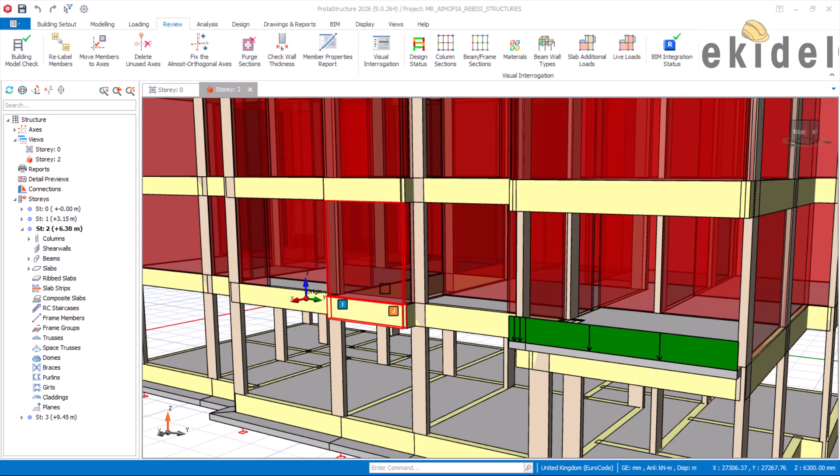In our last video, we performed the structural design for this building and for the raft foundation. In this video, I'll be showing you the structural detailing for this particular full building, and we will be using the detailing template to detail this building, where I'll be showing you how to detail the right connection for the reinforcement between the toe slab, the beam, and the slab, how they're going to connect together.

Using the 2026 version, I'll be showing you the right detail for our building on a beam raft foundation here, and then I'll be walking you through this foundation detailing for the raft and also for the sections, as you can see here, showing the full detail section and everything they will need for the construction.

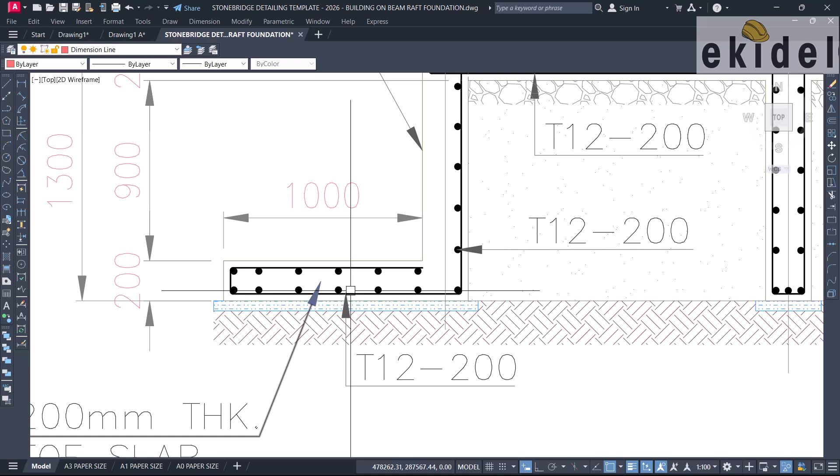And I'll also dive in to show you the structural detailing for the slab the right way, putting in all the lappings and all the principles for lap, and then also the connection for the reinforcement for the toe and the beam with the slab. You can see how they are connected like a stem, using a stem system principle, because a good drawing, a good design, and poor detailing can still collapse a structure.

So I will show you all the principles that you need to perform the detailing of this building, and also for the columns, how you are meant to detail the column base and the column section using the 2026 detailing. You can see a proper detailing here. Let's now dive into the full detailing for this building, which we did yesterday for the raft foundation design, knowing that this is a real life project we are working on.

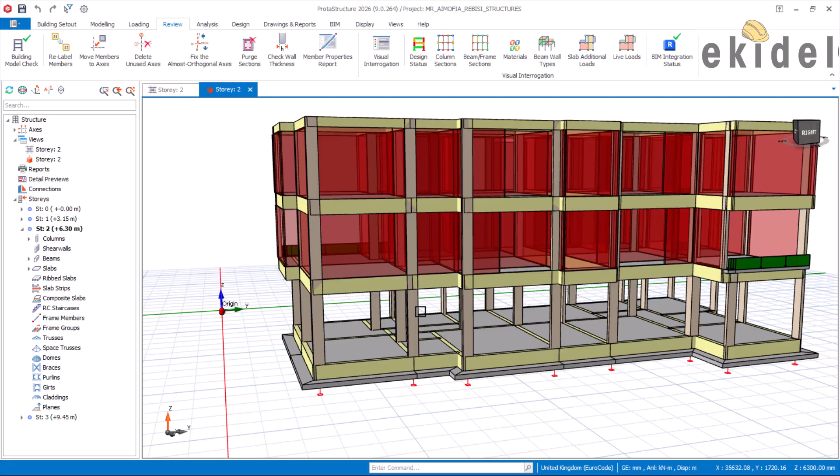So yesterday we performed the structural analysis and design for this building, focusing on the raft foundation, which we are done with, and now we are going to perform the structural detailing for this building, starting with the foundation. We will be using the detailing template to perform this structural detailing, so that we can get a standard structural detailing for this project.

Then we are going to export it using ProtaStructure, which we have already done in most of our videos. Once you're done with your design, which we finished yesterday, and you've seen your reinforcement, we then proceed to the structural detailing using the template, which works with AutoCAD. Now, this is the detailed drawing that was exported from ProtaStructure through the detail to AutoCAD.

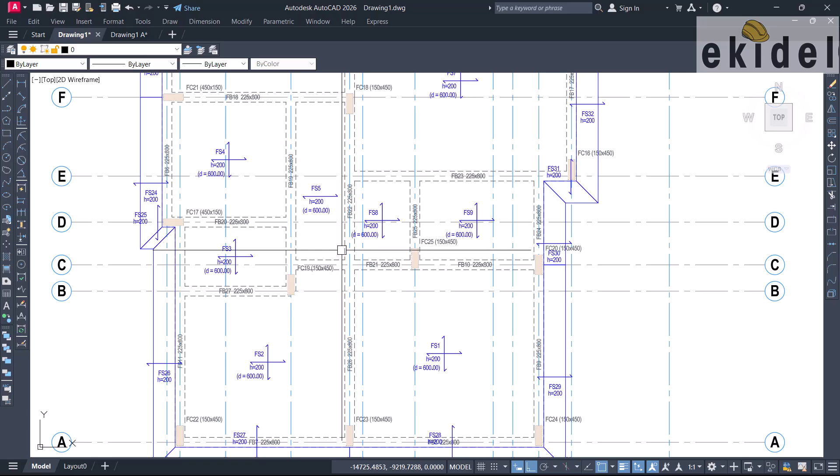Now, you cannot use this to present to your clients or for building, because it is not cleaned up and most of the detailing here is not correct, and you need to optimize this drawing, and that is where the template comes into play. So this is the raft foundation detailing.

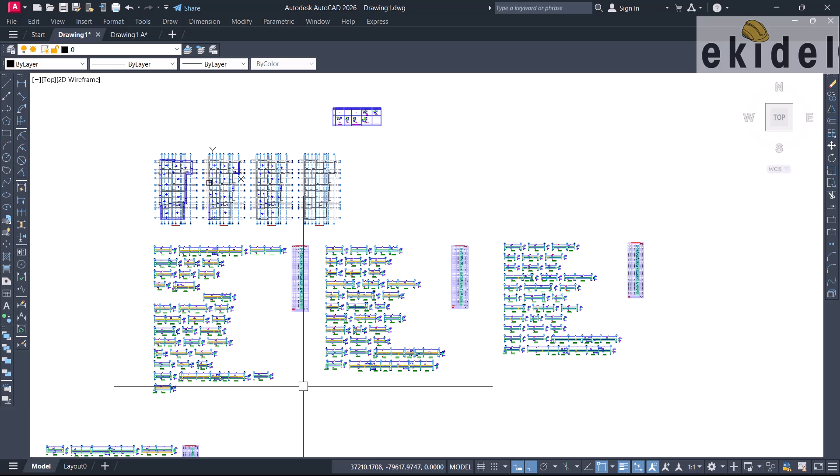We can see here F beam, which means foundation beam, and yesterday we used 800 depth of beam for our raft, and you can see the side bars and everything here, and you can see the bar bending schedule, but we are now going to optimize it using the detailing template. This is the column schedule, which we use for our column detailing using the template.

So I will now go and open the template. If you already have the template, it's located inside your document folder. If you don't have it, you can go to our Ekidel store just below this video description. You will see the link to get this 2026 template, and it will be sent to your mail automatically. Once you have that, you then open it just like this.

On opening it, you will see the interface of the template here. On this interface, I will launch this. You can see that it has different tabs. Each of these tabs has different templates, and we are dealing with what?

A beam raft foundation. So we come to here that says beam raft foundation, and then click on here to open this up. Okay, that's fine. So wait for it now to open up on the CAD file, AutoCAD. Now this works for any version of AutoCAD, either 2017, 22, 2010, any version at all.

So once the Stonebridge opens like this, you will see a sample here showing you a guide on how you are meant to detail, and how your raft beam foundation is meant to look like. So this is a sample that you are meant to follow. Now we will head back to the other side here, where we exported our drawings. These drawings are not optimized, as you can see.

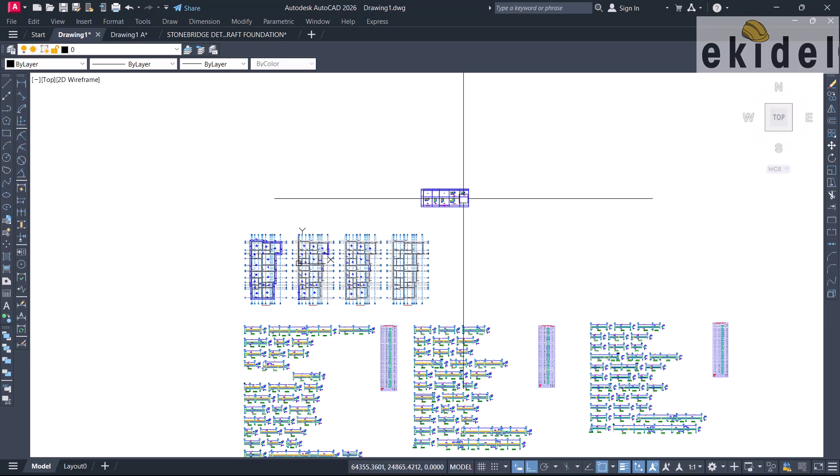So I will copy all this, highlight this, and then right click here and say copy. Okay, so copy from here, and open the Stonebridge template interface here. So I'll open this up, and then inside this box that you're seeing here, I'll paste it like this. Click here and then paste.

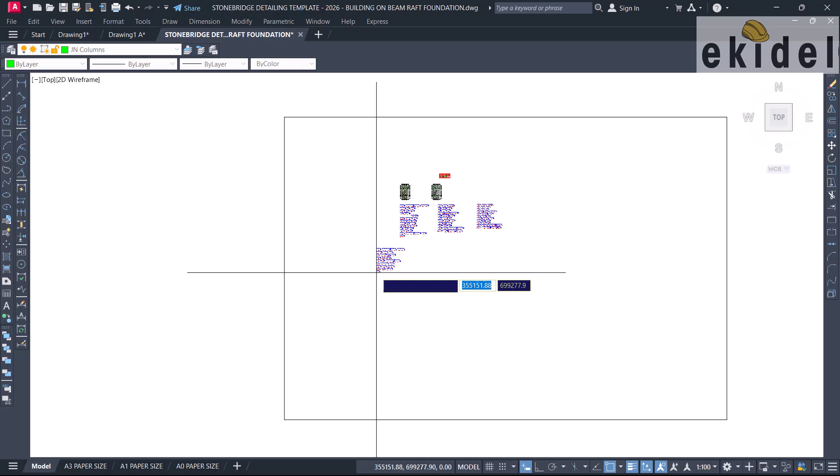Now once you paste it, automatically the Stonebridge will help you to optimize most of the drawings. Just allow it to paste. So we paste this here carefully, and you allow it to finish up what it is doing. So once it is done, it has helped to optimize most of the beams. As you can see, the beams now are optimized compared to what you had here before. So this is the one that came from Prota, and this is the one that's optimized. All this text now can be readable and also printable.

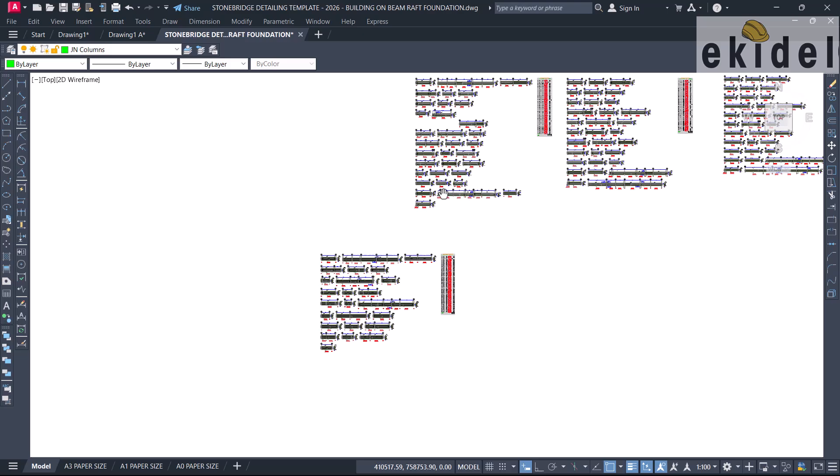Okay, that is fine. Then we will optimize also our beam dimension. I said that it is not dimensioned very well. If you look at the sample of the Stonebridge, they are showing you how your beam section is meant to look like. For example, this is the beam section here. You can see the text is appearing well. So this is the way it will look, and not this other way here.

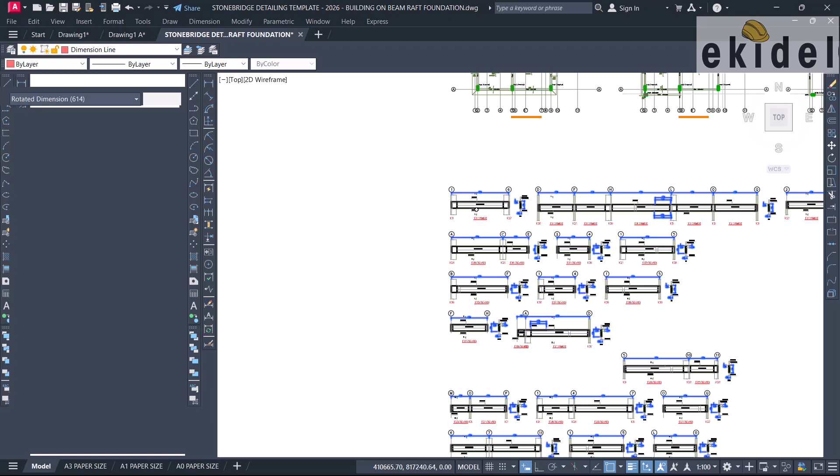So once you have pasted this here, what you do now is click on one of them. Right click and say select similar. Now scroll back and deselect this one so that it will not be among what you're doing. Hold your shift key and deselect this, and you have only this. Then type the shortcut CH and press enter, and that will open up where we can change that to optimize. Instead of doing it one after the other, Stonebridge helps you make it easier and faster.

So we then look at any of the sections like this. Let me start with the raft beam, which we have here, and then click on this dim style and then choose. You see STB beams. This one, STB beam dimension. This is the one we are going to use. So I'll click on STB beam dimension now.

Now once you pick the beam dimension, notice that the dimension will change. Can you see that they have changed? For example, here has changed from 4.5 to this. Here has changed from 225 to that value. Here is already 800. If I come again to change here, which is the right one, that will change. Just watch, it will change. Now when it changes, do not panic.

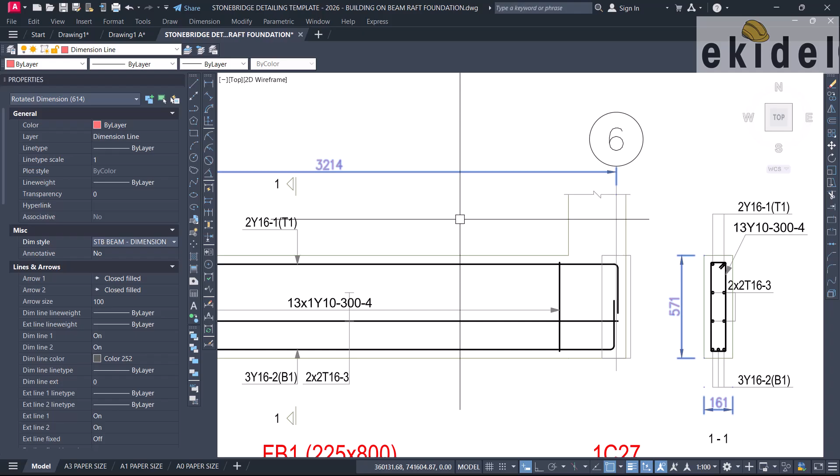Now what you use to control this is the scale factor you added when exporting your drawing from the Prota Detail into this place. For me, I used scale 1 to 35 for all my beam details. So you can see that they have all changed. Here was meant to be 225 by 800, but now we are having a different value. So once you pick this, don't click anywhere. Don't click on escape.

What you do is to come again, scroll down like this, and come to this place that says primary units. You see dim scale linear here that says 0.5. If you imported your drawing using the custom scale of 25, put this at 0.5. If you used 50, put it as 1. But now I used scale 35, so I'll put here 0.7, and then click anywhere else.

That will take it back to the right measurement. You can see that it is now 800 by 225. That's what we use. And this is also 45. Now for us to verify this, we've got to measure grid line 1 to grid line 6 on the foundation layout.

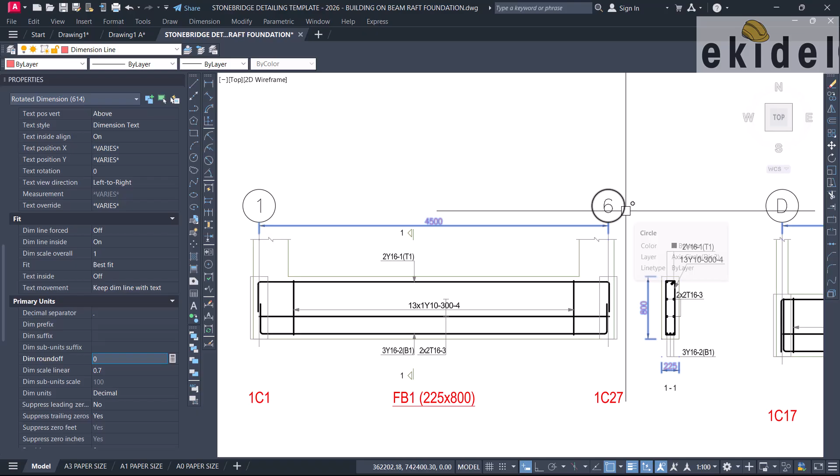So we then escape this and come to the foundation layout here. This is grid line 1 and grid line 6. So this was that beam that we saw. So we have to measure if this will give us 4.5 meters.

Now when you're measuring for a layout, type D first, enter, and make sure that the dimension line is set for STB dim 100 plan. Then click on current, and then say okay. Then let me change this to dimension layer here, dimension lines. Then I will dimension this from grid line 1 to grid line 6.

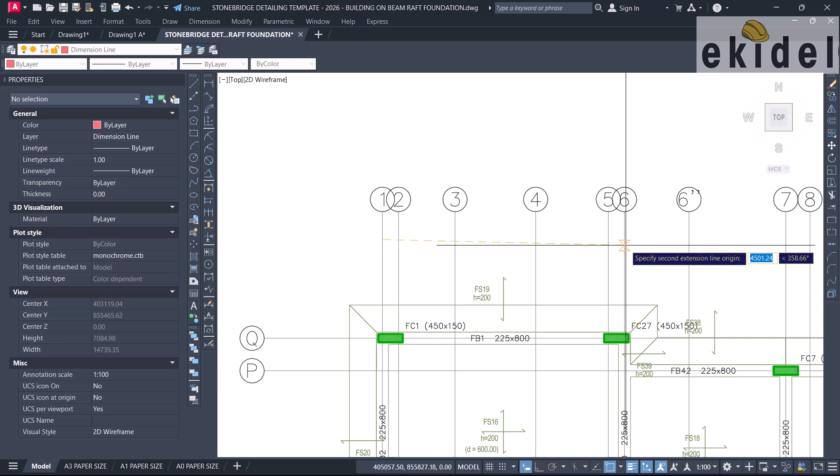What do we have? You can see that currently this is 4500. That shows that our dimension here on the beam is okay. So we go back, we have changed it. You can see that from grid line 1 to grid line 6 is 4.5, correct? And again, you can see the foundation, the same thing. So we have now verified this, and you can see how we have restored this back to the required dimension.

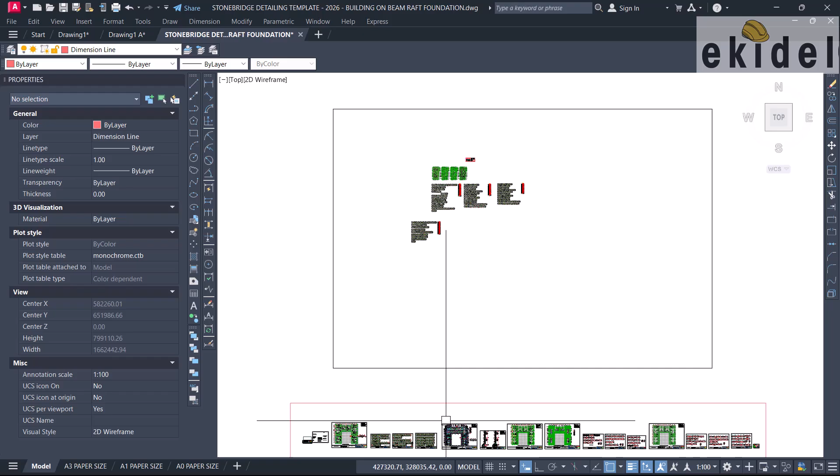Okay, that is fine. So next we'll proceed. We have now finished our beams. You just put them on the sheets, just as you are seeing here, arrange them like this on the sheets. But before then, we are going to focus first on doing the foundation layout, which is the first thing to do here, and the section.

So this part 1 video for this particular detailing is for the foundation layout, to make it look like this instead of what we have here. This is not nice to present to a client. So what we'll do now, we have to move this out, separate this from this environment, and keep it somewhere here. Okay, that is fine. Now once you've done this, let me close that one here.

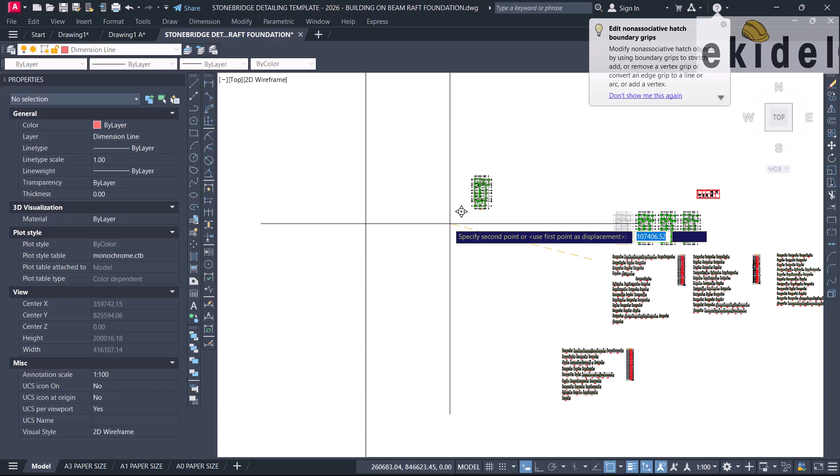We then go over to this sample here and bring our sample closer, because this is what we are following. Sorry, not this one. This is the layout we are working with, the first drawing. All these ones are notes, so they can be edited later. So copy this closer to where we are working, and keep this here. This template has been tested print worthy, so if you use it, it prints your drawing fine and standard.

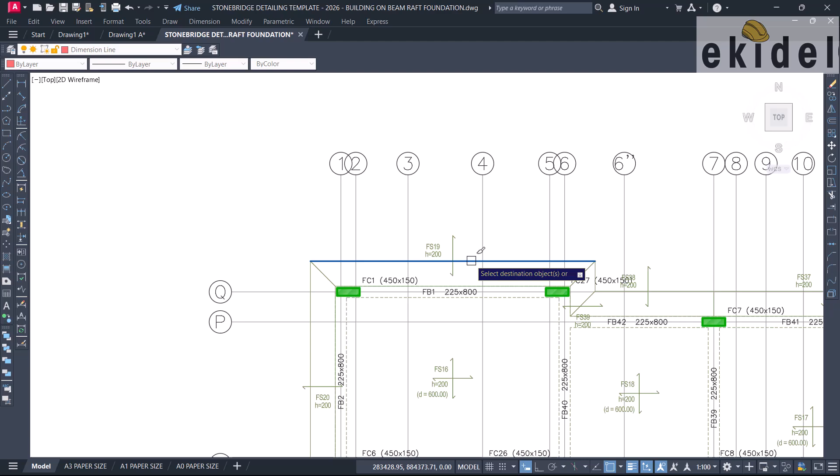So what to do now, these are the slab edges. So just do MA, enter, and match this. Click on this, and then begin to match. Now before then, I want to remove all these things from here, because you can see that we don't have it here. We have a separate one which is more readable and standard. So I'll click on this text here, click on this, and this, then right click, and say select similar.

Now once I've done that, I'll come here, click on shift, and then select this one. Select this one, and again click here, enter. Okay, that is fine. So once I've done that, I'll do MA and match this again to match the property of what we have here. So match this and then match this.

So just match all the slab to have what you have on your sample, just as you can see it on the sample. You match this, so it is just you replicating what you have on the sample, which means you don't have to think of what to do next.

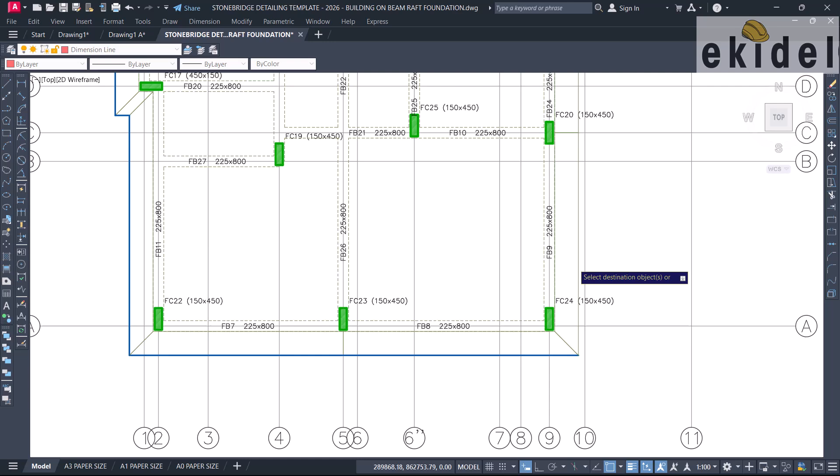Then there are some appearing too, so take them off again so as to have a free flow like this. Again, do the same thing here. Click on this and then this and then this here and then here. That is fine. And then press E, enter. Okay, so once you have done that and pressed E enter, we now have smooth edges without anything cutting through.

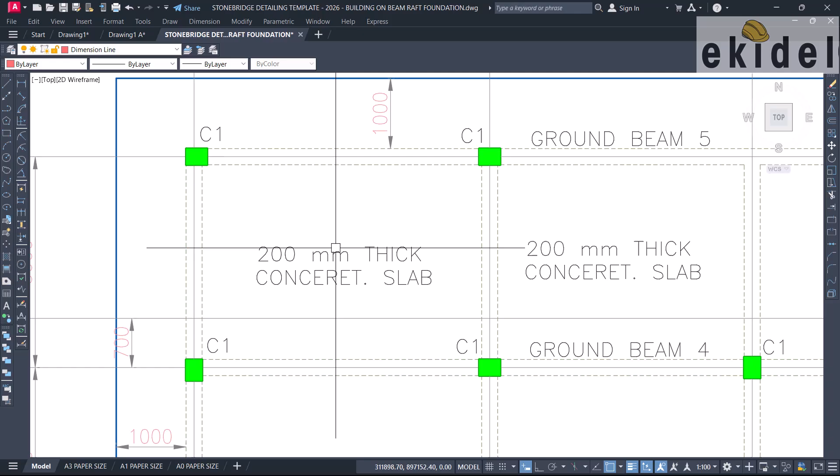We then come again to our sample here. The sample shows that we will have to title each of the panels based on the slab. So we also use 200 for our own design. So just copy this from here and then go all the way down here and begin to paste on the panel. So we paste this here and this other one here, telling the person at site that these slabs here are 200.

So we can just paste them where we have our slabs, paste this here and here and here. Now anywhere that is too big, you can right click, come here and reduce the scale a bit by typing 0.75 and then enter, and then copy this again. Actually move, move from here and keep this here, and again copy, CP or CO, copy from here. We also have it here, then here.

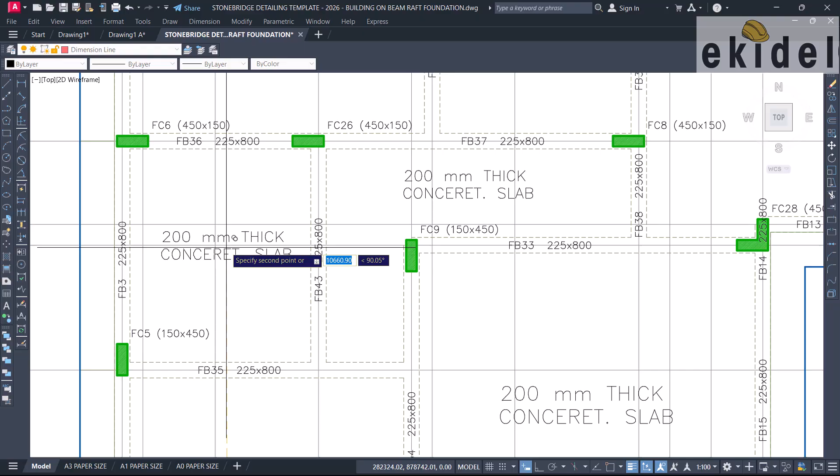Okay, that is fine. So we'll keep this here and keep this here. And again, let me see, we'll keep this and then keep this here. We can choose to match the properties now and match this. Actually, I like this particular scale because this other drawing looks a bit small. So I will use a smaller scale of 0.75. Okay, so I can do this like this now. Then this, and touch this and then touch this.

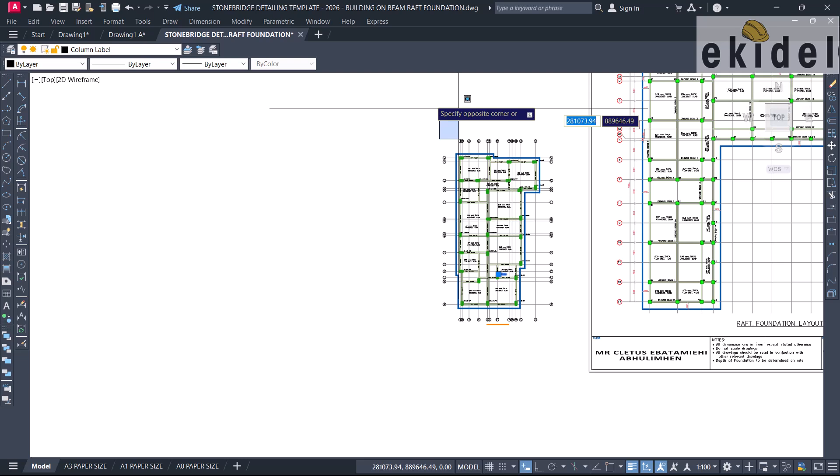Okay, once I'm done with that, I will move on to tagging of the beams. Because we will take off all these ones later, I'll tag the beams. What I can do first is to hide my column names because I don't want to use these now. So I'll hide my column names by clicking on this column, and then select similar, and then I'll zoom back, shift key, select this, and type hide.

I'll click on this hide now and wait for a while. Okay, hold on. So I will say hide object, so it is now hidden. So now we have a clearer view. I can also choose to hide my grid lines first because I don't need these to be showing now. Come again here, type hide. Okay, hide objects and hide that too.

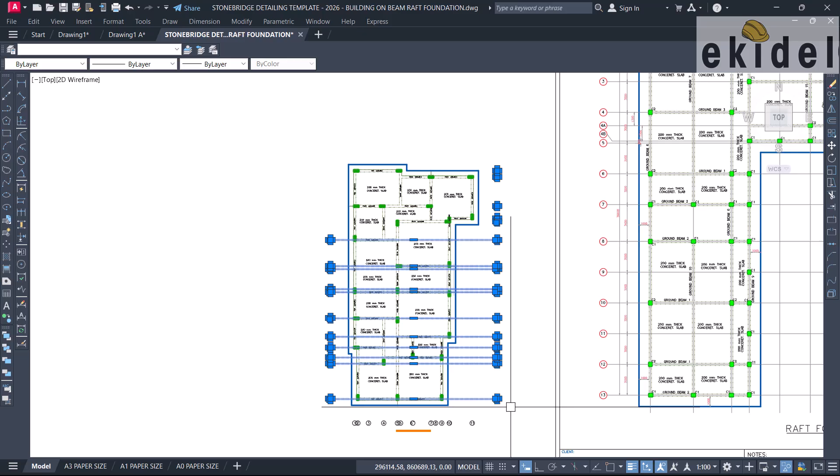I still have a few of them here. Highlight like this, then this one and this, and I'll click here and say hide object, correct. So now, come and copy the beam here, CP or CO, copy this and then come here and paste this directly here.

I'll also reduce this beam text to 0.75. So I'll say scale, SC, click anywhere around here, type 0.75 and reduce that. That is fine. I'll then copy this now. This will be my beam 1.

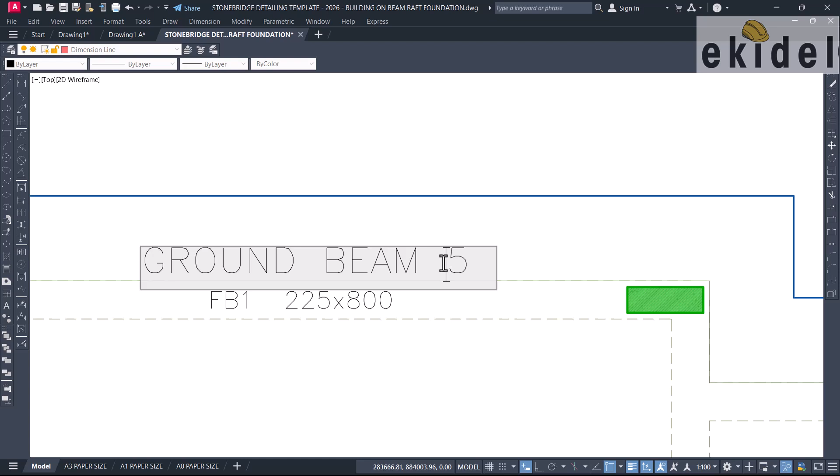So I'll begin to name it now according to what we have here. So I'll click here and then name this beam 1. Okay, I want to have it serially. So I'll say copy and then come again here and name this particular one beam 2. I'll remove this; we didn't take that off earlier. So this will be beam 2. Let me just paste first, then I can choose to rename.

So this will be beam 3 here and then this will be beam 4. So you do it serially as they appear. This will be beam 5 and then this will be beam 6. Okay, and then this will be beam 7, this will be beam 8 and this will be beam 9. So make sure you do it serially. This will be beam 10, then beam 11, this one beam 12 and beam 13. Then the final one here, beam 14.

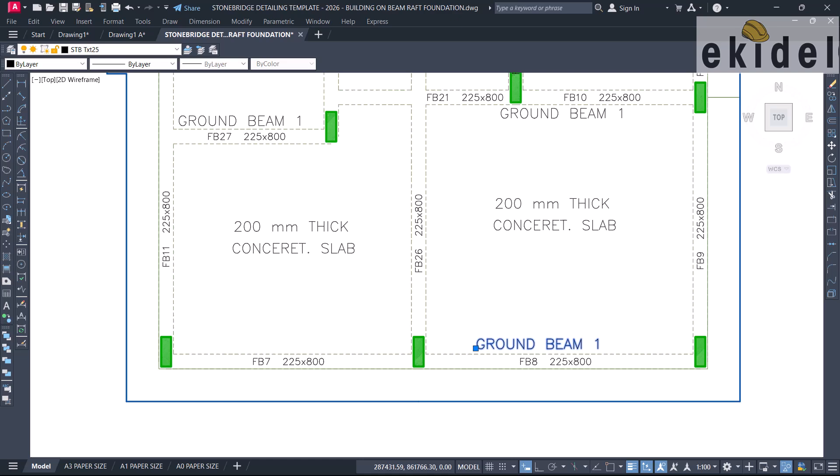I can put it here, beam 14. I'll take this off now so I can choose to number it. This is beam 14. Then touch here. This is beam 13. Come here and put in 13, and then come here. So just number them the same way. Okay, that is fine. So I'll pause the video and then finish up the whole numbering. So this is beam 12.

Okay, so we then come now and name the final one here, which is beam 2, because we are done. This is the last naming we are currently going to do here, beam 2. So once you have named this, you can see what you've done so far. You can see that we have named all the beams. Next thing we'll do is to come here and bring back our main grid lines, so now we have our grid lines appearing like this.

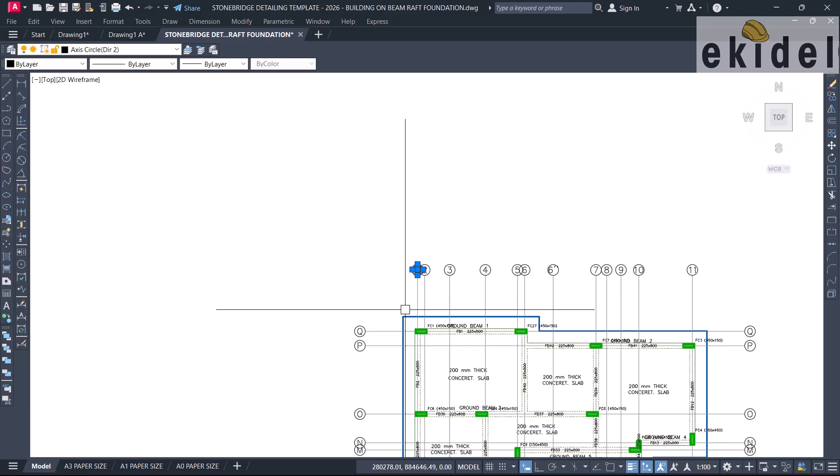So we come now and say unhide, okay, then unhide, okay, then allow it to finish up. So now we have all these hidden out like this. We then click on this, and you can see that this says utility. So we are going to convert this to utility, and this other one too. Click on this one, right click here and say select similar. Then click on this and type utility. Make sure here is the layer. Okay, that is fine. So this all changes now.

Now look, there are some grid lines that are not useful. For example, this grid line 3 is not useful. It's not pointing at any beam or column, so we take this off. So we take off all the ones that are only useful on the foundation level. For example, this grid line J is not touching anything. Can you see that there is no beam, no column? So leaving it here is of no use, so take it off. Only leave the ones that are very useful.

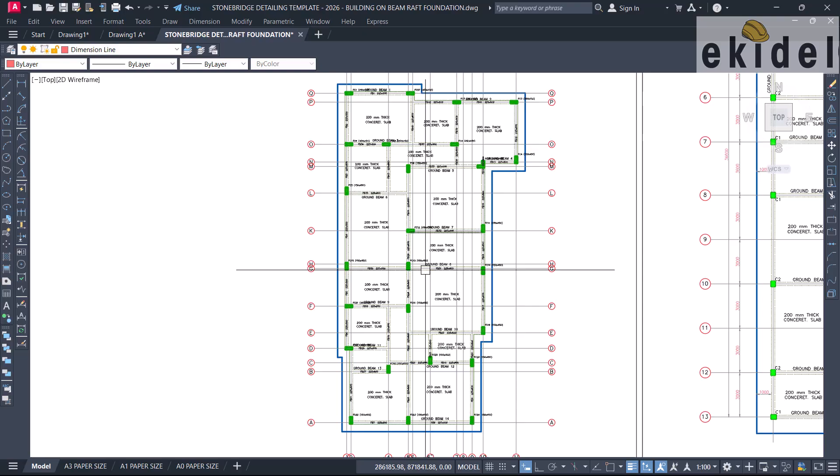Okay, then we look again. We have looked at all that, then come here to the horizontal ones. These are useful. Then let's see these other vertical ones. This one is useful. This grid line 8 is not useful, because you can see it's not pointing at anything, no column. Take it off, and let me take this one off too because we'll have a title there. Then this one, let's see.

Now apart from that, there are some grid lines here that are only useful at one point. This one will cause confusion because they'll be asking where this column is actually starting from: this grid line or that grid line? From our design, we started the column from this grid line. This is the point where the load is being transferred. So we are going to trim this one off from here with a break. This grid line is only useful for this other column here.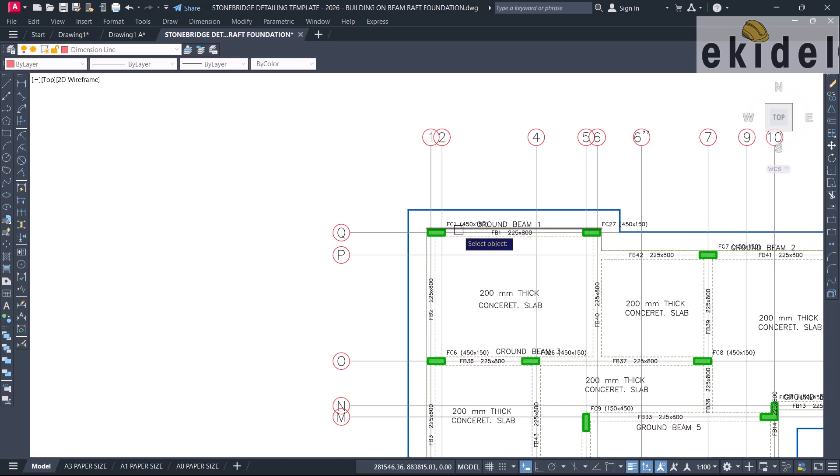So in that course now, we will have to trim it off from here. From this point, we trim it off and then go and break it all the way down here. And on that note, we take off this now. Delete that. Okay, that is fine. So you can see that they will then come again here. This grid line 1, we can leave it.

All we'll do is to do what? Stagger this one like this. We stagger this like this now and have something like this. Keep like this, come like this, and then pick a point from here to trace like this, and then keep this, and again come like this, MA, come here, keep this one here, right click here, this, then come like this, and then T, trim off this.

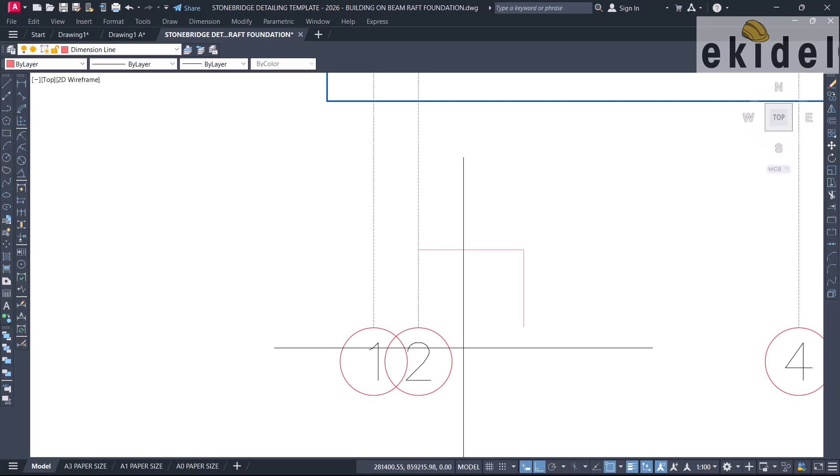Okay, that is fine. Can choose to do something like this by stretching backward like this. It's still okay. So on that note now, we have that done. Okay, so we then come again here for this other one too. This other grid line here, grid line 5, is only useful for this. So in that note, we do B, break it from this point all the way down here and take this off from here. E, enter. Okay, sorry, again E, enter.

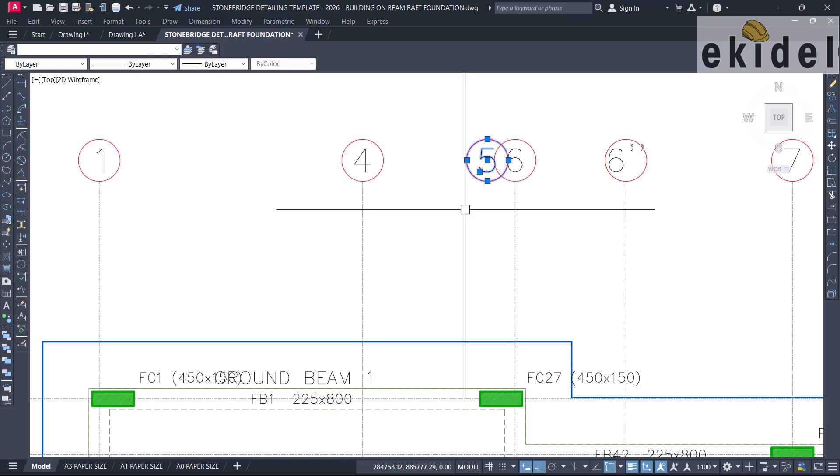That's fine. Then this grid line 6, where is it useful? Is it useful anything around this down here? No, it's only useful for this particular beam and this column here. So with that note, we are going to remove it by breaking it from this point here and then break it all the way down here. So when you have so many grids combating like this, it's not nice. So leave only the one that is very useful.

So at this point, they'll see grid line 5, but at this point they'll see grid line 6, because grid line 5 is not useful to be showing here, and grid line 6 is only useful around this region here. So in that course, we are not going to show it here. Okay, that is fine. So once you have done all that, now we have done our vertical ones, which are okay. What about the horizontal ones? Let's see. Another one appears okay, except this one that is too close.

So in this one now, this grid line, what we'll do here is to stagger it. We stagger it like this. You can stagger this H like this, come up, come here, and then come and trace there, and then have this here. Then copy this, move from here to keeping this here, then extend to this. That is fine. Match property, match this now like this. Okay, that is fine. Then trim off like this, then come here.

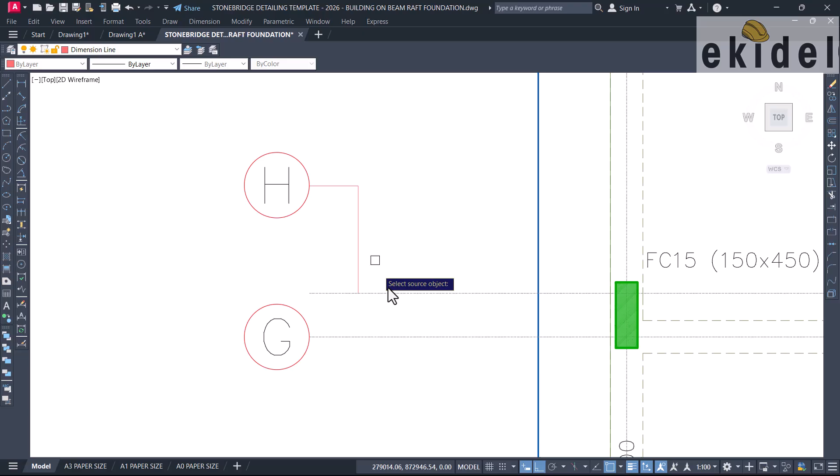Then I'll come like this now, MA or MI to mirror. Now before I mirror that, okay, let me just leave the mirror and then do this other one here, mirror that, and then come here, do this like this, keep this here, and again come like this now, then move this and then keep this here, then TR, trim off this, and then MA, come here, match this like this, correct.

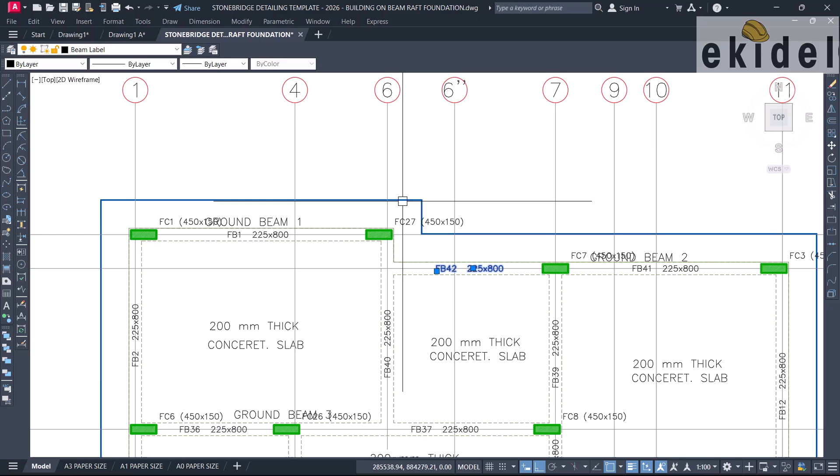That is fine. So once we do this now, let's now hide this particular beam one, because we don't need this for now for our GA. So we'll hide this one first, and then come like this. This is beam layer, this is beam and this beam label. Come here, and then come like this now. Hold my shift key and select this one. Okay. Sorry, I say hide. Select that. Come like this now and say hide. To show hide, then click on this hide object here. That will be hidden. Correct.

Then this column too, we don't need it for now. So come again here, select similar, and then again highlight, hold your shift key and highlight this one to select that. Again hide like this, so that you can have a clean one. We can add those ones later when we are done with that stage. So in this phase now, we then do what? Focus on this other one now here. This one also needs to do what?

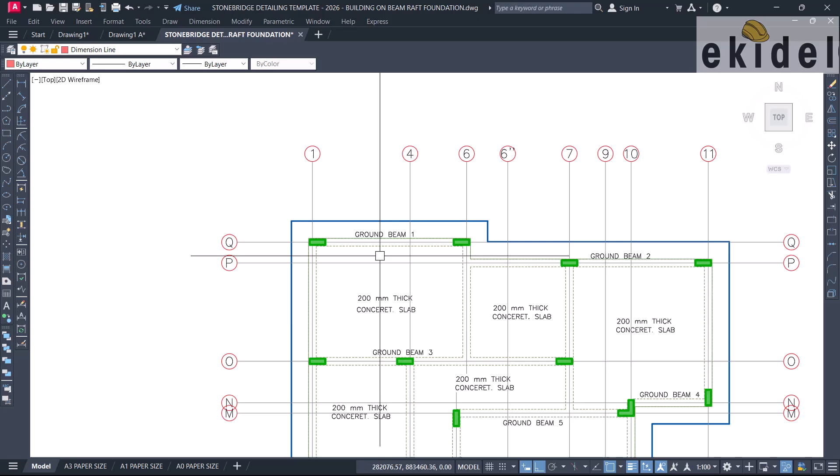Stagger too. Although we can choose to use the break point, because this grid line N is not useful. It's only useful from this place to this place. So in that course now, I'll break it up from here all the way down here, and then remove this N here.

And again, let me come here again now. This one we can leave it because it's now this other one here. We can choose to leave it because this is okay. I'll break it up from here all the way down here, and then take off this up. Correct. So we have this dimensioning M here and N here. Okay, that is fine. So once you've done this now, then proceed to do what?

Dimensioning. So in that note now, make sure you activate your D, enter, and make sure that what is on is the STB DIM dimension. If not dimension layout, make sure that this is on, or any of this, either 50, 25, but it must be plan. Okay, it must be on plan. So in this case now, I'll say /similar. Again, click here /similar, and then select comment, then say okay. We then come now and then type dim. Okay, that is fine, and enter.

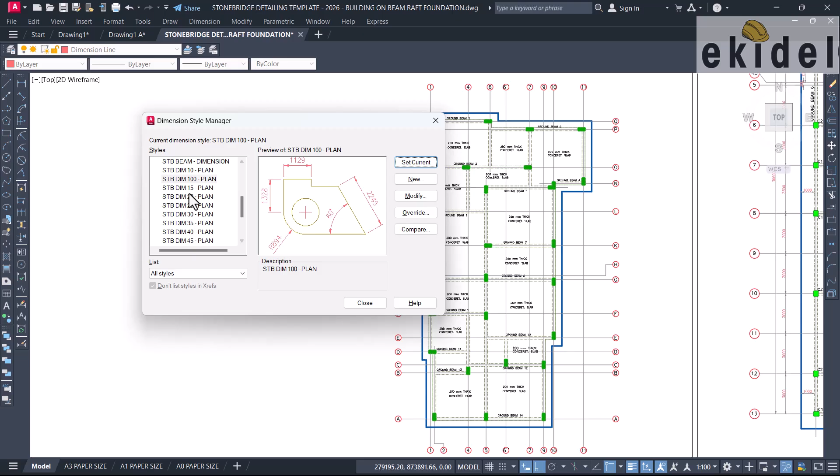Then dimension from here now all the way down here, and then click on anywhere here. I'll type dim_cont, enter, and I'll call again here, and then click on this, and then click on this, and then click on this, and then this, okay, and then the final one, this. We then come now again dim_line, enter, and again from here all the way down here. Okay, that is fine. Click on this, click on this, click on this, and shift this here.

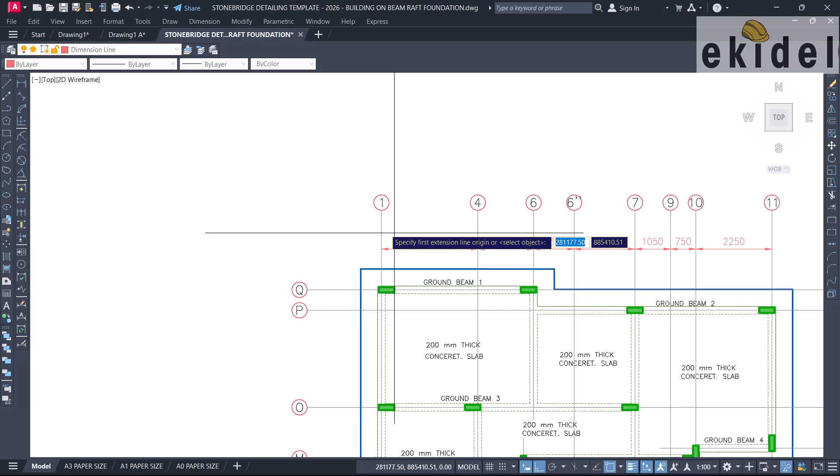That's fine. Again, continue. So do the same thing for this other direction here too, dimensioning this. Keep this here. Move this now to be inside the dimension phase here. Move this backwards like this. Okay, and keep this here. Then type dim_cont, and then continue from that point to here, and then to here, and then to here. So the same thing you dimension for all of them. Now pause the video and then come back when I'm done with this. Okay, so now you can see that we are now done dimensioning all the faces.

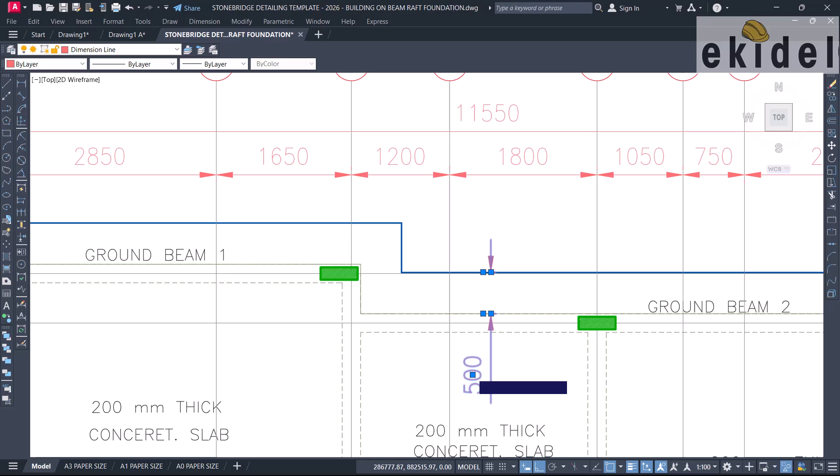Then knowing that we have an offset of our toe, we will then dimension from the toe face down to the face of the beam, so that it can be seen as 500. Then make sure this is placed at the center of that, and then move this backward like this and keep this here. Now do the same thing for this other direction. Now we can do match property and then match this to fitting this like this. Okay, that is fine.

Again, we can see that we have this dimension here; we can choose to match this like this, and then match these two like this. So match this like this, and then this and this. To make this faster, look at the layer that was done with this, and you can see that it is JN here. Can you see that JN, which is matched to this? So in that note now, you can type D and then press enter.

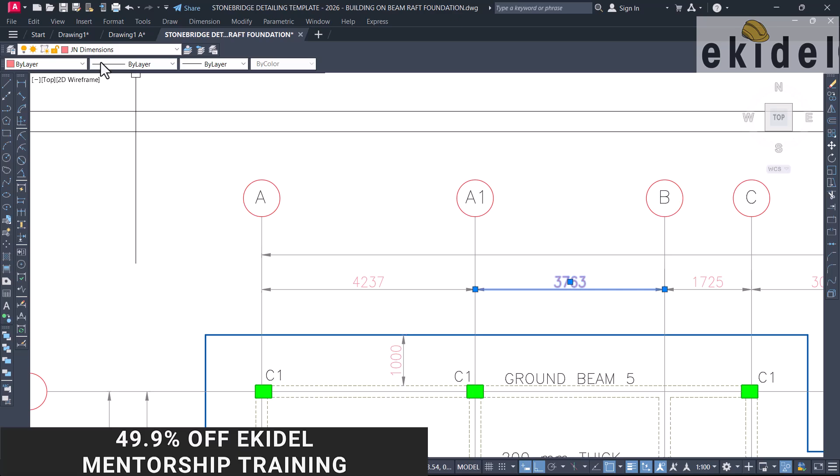So once this shows up like this, while you're on this, click on modify, and then if you want to modify the line to gray, which I love, I can choose to change that, but you can also choose this one, which is also good. Then come to line now, and then choose gray. Instead of using by layer, you can choose to use color 8 and then say enter, and again here color 8 and then say enter. Come to color 8 here and then say enter, and that will change automatically.

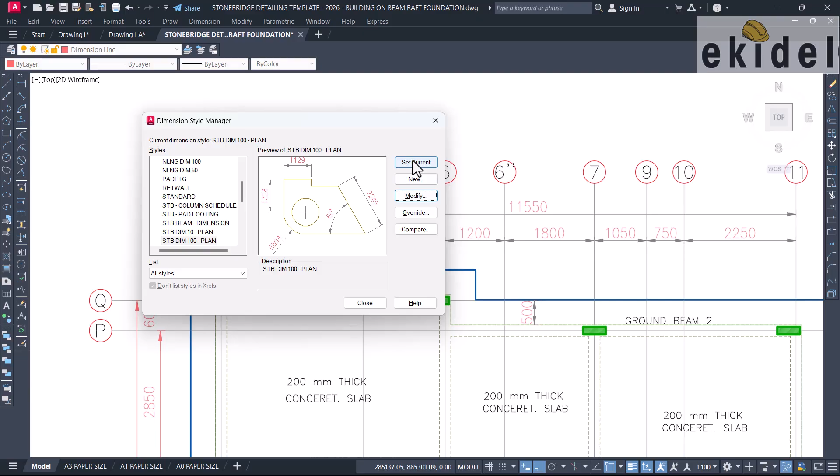Then click on OK, and then set current and then close. It will change now. All have changed, okay, which is also good. It also prints well. So once we have achieved this now, the next thing to do, since we have dimensioned this here, is dimension each of the faces of the toe, so that they can know it anywhere they are seeing it. Then MA enter, you can do this like this, and then match this like this.

Then come here, click on this, and then click on this, and then click on this here, and I'll match this now using the other one which I already have by clicking on this here, and then come here and click on this other one here. Correct, that is fine. Then come again here, click on this now, and then match also a dimension at the bottom here like this.

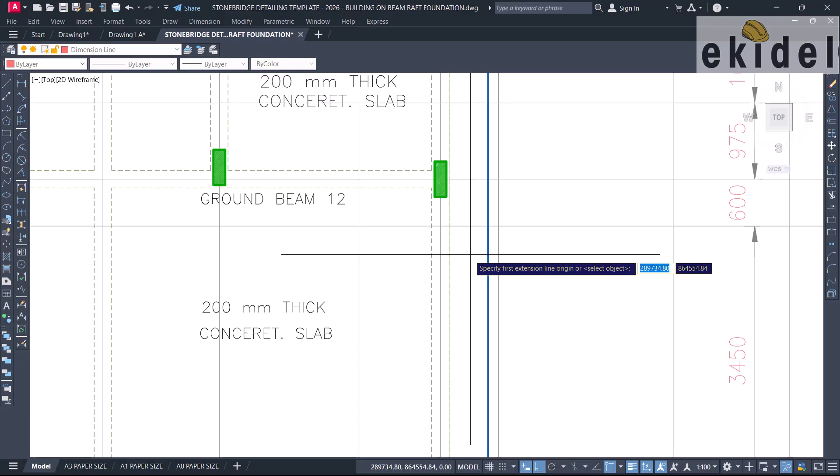Okay, keep it here first, after I'll match it, and again one here just to have some kind of distinct dimensions showing different faces, so they know that all the faces are 500. That's okay. Then match this now, and then click on this match, and then come here, match this, and that is there, and match this, it is there, and then match it, that fits in, and then the final matching, let me see, okay, here is okay, that is now correct.

So with this, now you can see what we have done so far. We have done this, can shift this off from the grid line here and keep this here. Okay, that's fine. So you can see what we've done so far right now. This is now the complete version of that, which we have made to look exactly like this. The next phase now is our column numbering and our beam numbering. Sorry, our column numbering only, that is what is left.

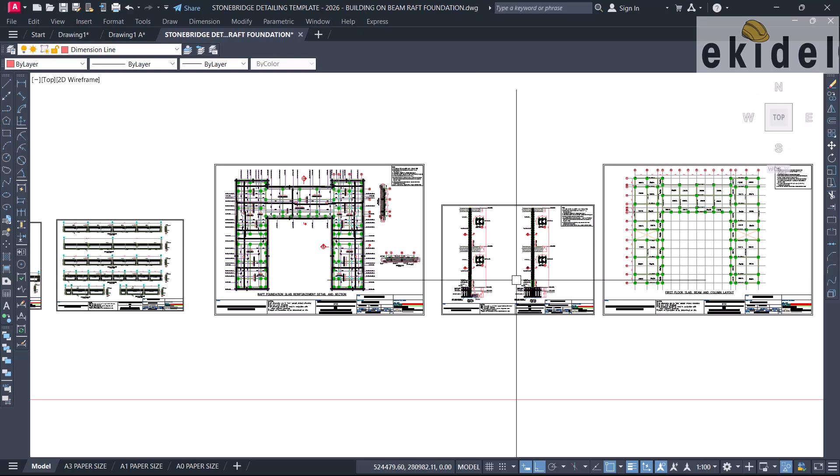But that will be done when we are doing our column detailing, which is here, because it is best to number your column as soon as you then also do the detailing, as you're seeing here. This is the toe and this is the beam. Okay, sorry, this is the raft slab and this is the beam. You can see how well detailed it is. So this is what we are going to achieve by the end of this drawing. Okay, that is fine.

So the next thing now is this raft slab section. So for us to achieve this, we come like this now and copy this section symbol that we have here like this. Copy this, and then also copy this one, CP or CO to copy, and then press enter and copy this across to this other side. You can choose to keep it here first. Now I can choose to copy.

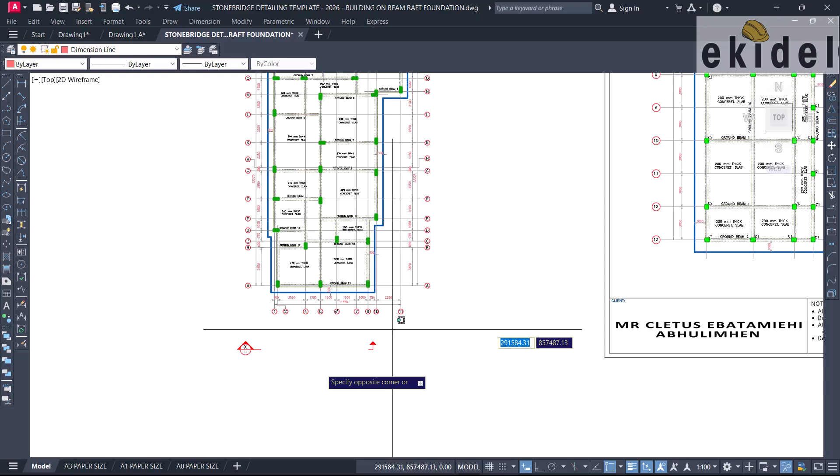I want to scale this down because this joint is smaller than this one. I'll scale it down by 0.75. Just type scale, SC, enter, and then type this here and type 0.75. Okay, that is fine. Then come again now. I can choose to copy this now like this. Move it, not copy.

Move this from here. I want to cut my section from here and keep this section cut in here. Type XL, enter, H, enter, and then have a trace of this, and then move this one again here. Move from the point of this place here, and then keep this particularly here. Then take off this line. We now have a section here, so I will then copy this other section which you have here as a sample.

No need for you to now go and start brainstorming what to do. Then I can choose to keep this particularly here. Now before I keep this here, I have to type XL, enter, V, enter. Now from where my lines are cutting, I'm cutting from this direction like this. You can see where it's cutting, so I'm going to bring out these points by clicking on this and then clicking on this, and it will cut through this beam.

I'll click on this beam grid line. It will cut through here again. I'll bring this out, and it will cut through this final one, bring this out. Correct, that is fine. So in this phase now, I'll click on my toe slab, move this now, move from my toe slab edge here onto this toe slab of my own here. Now my own toe slab is 500, while this sample that is here is 1000.

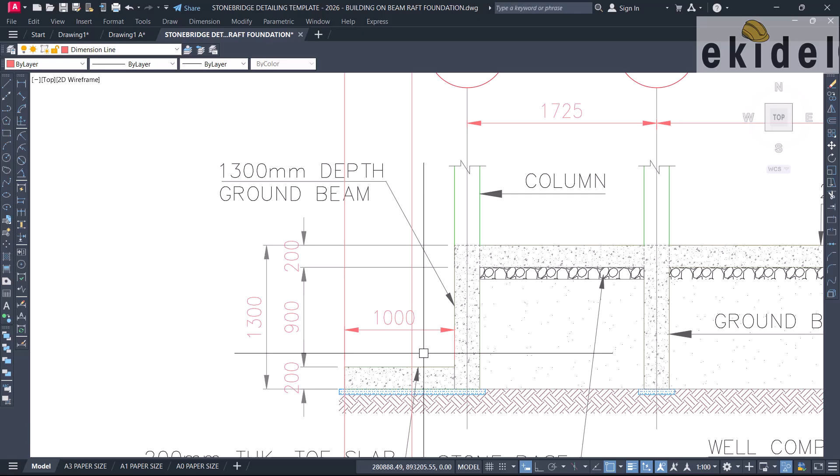So what do I do? I'll stretch it backward to 500, so here I can change it to 500. So I'll come now and highlight like this, and then hold my shift key and select this one, and then type X, enter, click on this particular point here, okay, and then move it backward. You can also dimension this, because basically they are not going to dimension it for you at site, just to have a clearer printing.

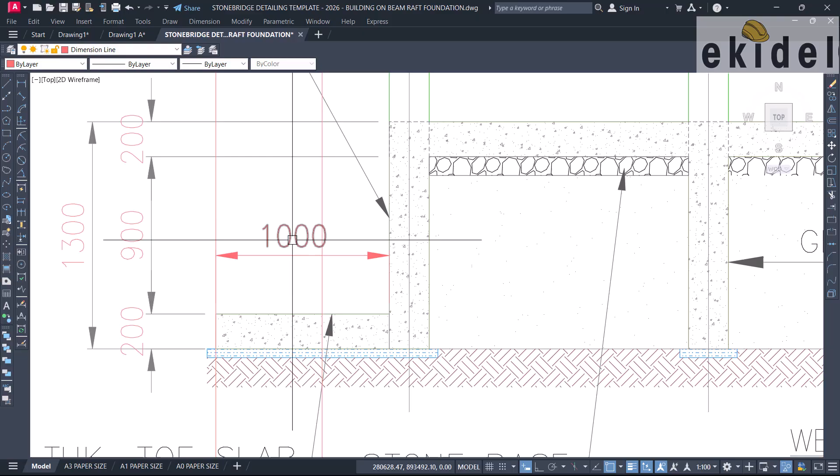Just don't do all that. Come here now and change this basically to 500. Yeah, this is easier to do. So come here and change to 500, to what we have on our own. Then again here, let me just take this off now, just keep this here like this.

So after our beam here, after our edge of slab, we then have our grid line. And here is grid line 1. So I'll come here and change it to grid line 1, and again make sure it is at the center. Then from grid line 1 to the next one I have here, this is grid line 5.

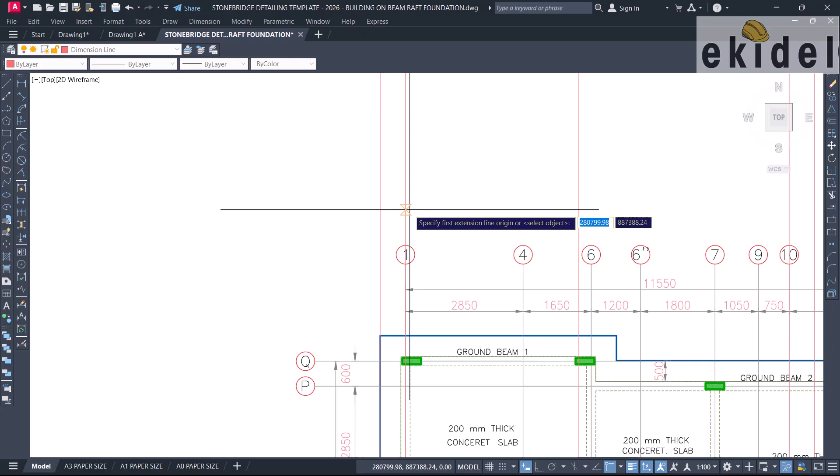You can see what their distance is. I'll measure from grid line 1 to grid line 5. What is their distance? 4200. So I'll come now and remove this one. How many beams do I have? I have 1 beam, 2 beam, and 3 beam, which you can see here. This line cuts through 1 beam, 2 beam, 3 beam.

So I'll take off this one. I'll move this beam block here and keep this here first. Then remove this particular one entirely like this and press enter. And again, I can now do J enter, join this together like this, right click, join here again, J enter, and join here again, and then I can choose to explode this or just move this.

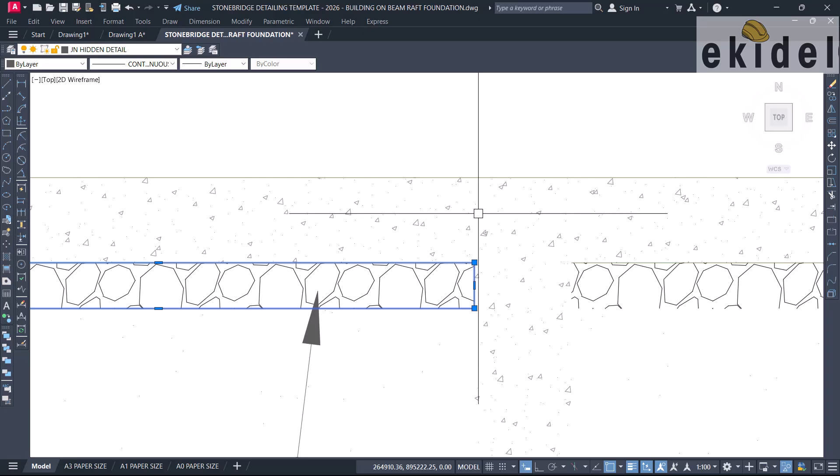Or take off this first and then join this by using J enter, and then enter. Correct. Now I can come here, not move but stretch this to join like this. That is fine. Then I can click on this line which I have joined already, and type TR, enter, and trim off this one that was passing here and here too.

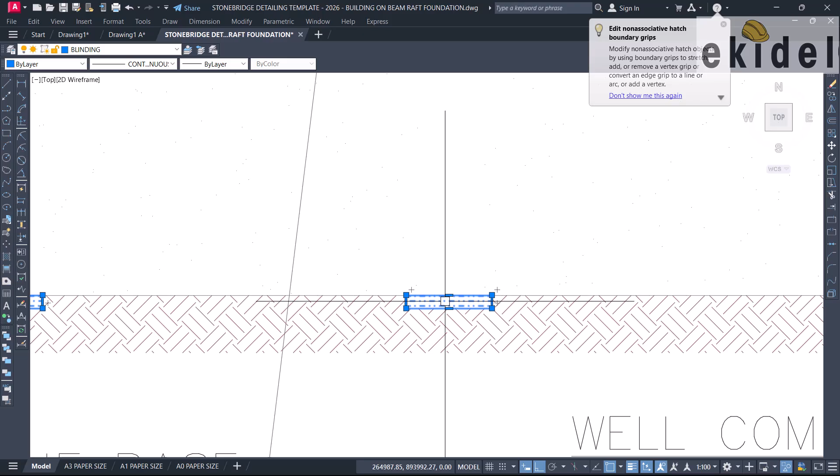That's fine. Then this one too should also go off. So to do this, I will type TR and trim off this entirely. Come here, click on this and cover this up like this. Then come here, click on, then cover this up like this. That is fine, correct. They are all meeting now. Then here I will come here and remove this entirely like this.

Here too, remove this too, and since I have 2 beams and that distance is 4200, I don't want to draw to scale, so I'll just dimension from here to grid line 5, and keep this here. I will change this now to 4200.

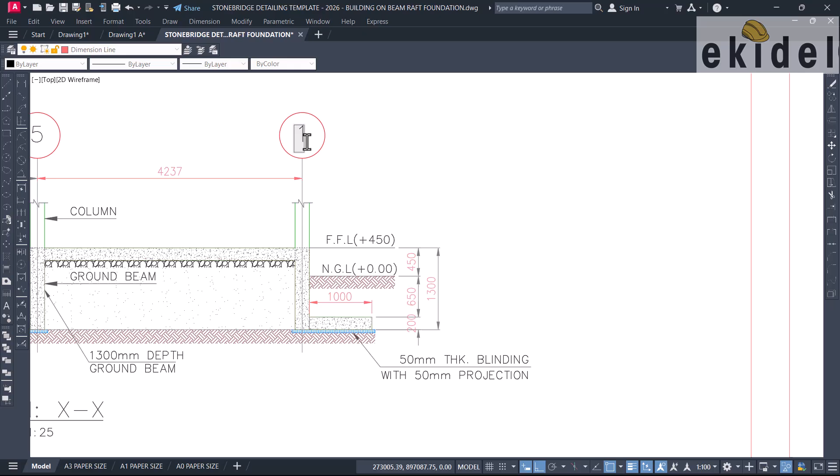Okay, that is fine. And here is grid line 5, change it to grid line 5. What is the next grid line? The grid line here is grid line 10. Can you see where this line is cutting? Grid line 10. So this is the last one. I will go and confirm the distance of that grid line. So change it first to 10 and make sure it is aligning at the center. Move this backward like this and keep this here.

Then click from this grid line to grid line 10. That gives you 5100. So I'll take off this entirely like this now. I can move this out and keep this here first, and then type DCO, click here, and then do this. Yes, that's fine. Then here is 5100, so I'll change this now to 5100.

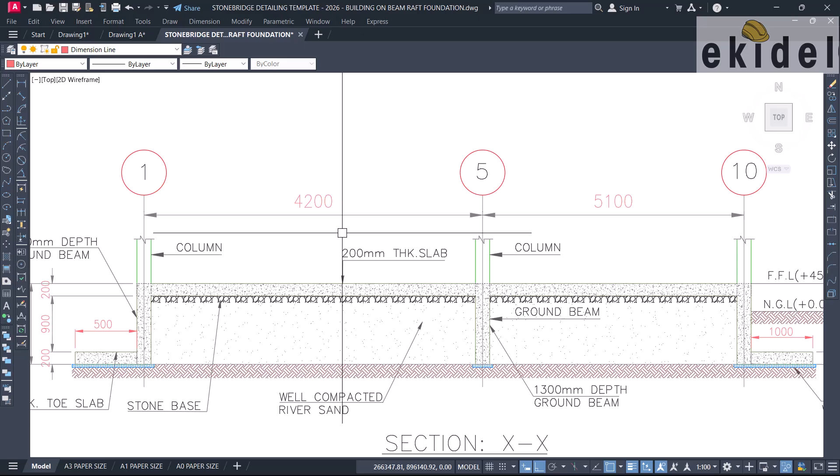Okay, 5100. Since 5100 is bigger than this one, I want to have a clearer side view. So I can remove this one first by moving this backward like this. Now I want to stretch, so that this one will be showing bigger instead of the 4200 showing bigger. I'll stretch this like this now.

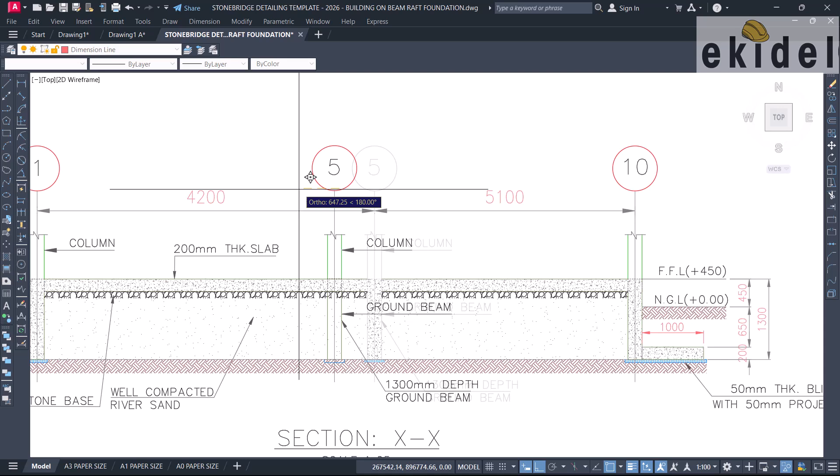Okay. Now we need to do something here. So what I'll do now is highlight like this. Again here, and then move this a bit so that 5100 can be bigger than the 4200, because in reality it is that way.

Then move this like this now, move it from here, stretch it backward like this, and keep this here. Correct. So again now I will click on this now like this. Now TR, trim on this, then hold my shift key, click on this one here again. Sorry, click back on here, click here, and then bring this thing back here.

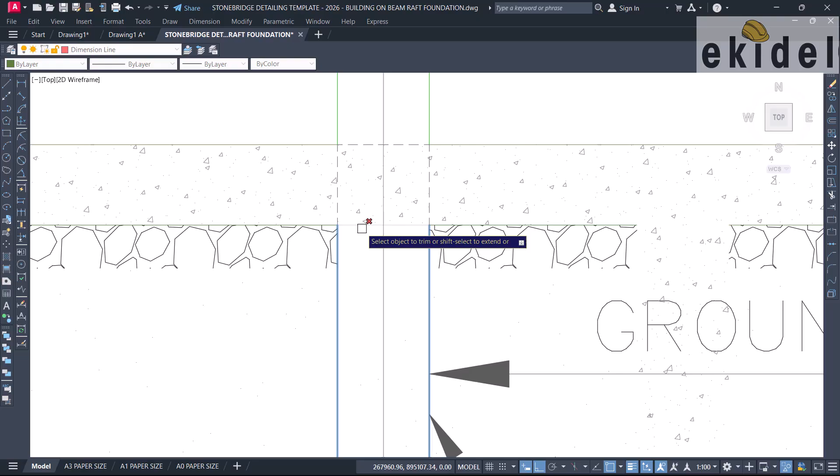Okay, then again I will hold this tool like this, TR, and then trim off this excessive one here, and again this other line here too should go off. Then we have this J, join this, type J and join these two together like this. Zoom this up, right click, and then that is fine.

Again, click on this and click on this, TR, trim off this now excessive one here, and again here, that is fine. Then highlight like this, click here, move here, and then keep this one here. Again, click here, okay, move here, and then keep this one here, that is fine. Then we come now, and then escape, click on this one now, click here, and then keep this

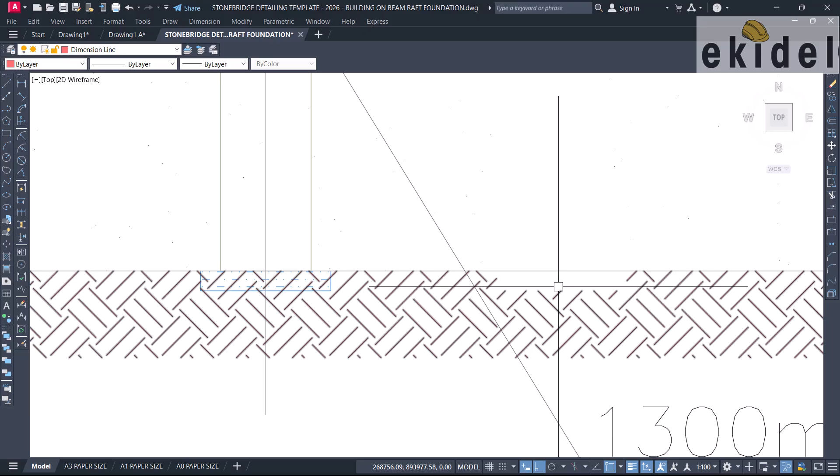one here. Again now click on this box here and highlight this box like this, type TR, and then enter, and trim off this excessive one here. Correct, that is fine. Then we come now, this beam depth is 800, so I'll click on this and then type 800 here, type 8 here, CP and Control A, Control C, and then enter.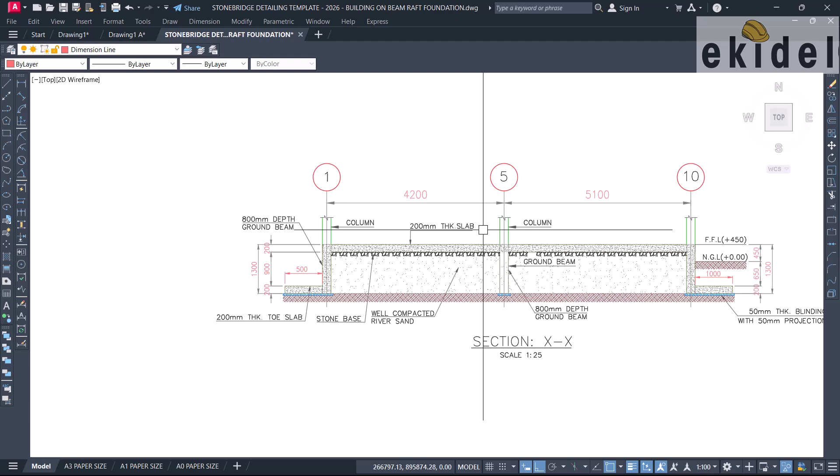Come here again, where is that one again? Here, change this again here, click on this, open it up, and then change it, Control A, Control V, that is fine. And again, that is all. These ones are normal, 200. Then here to change to 500.

So if this is 200, which is the slab, the beam should be 600, because 200 together makes up the whole of this. So here now will be first of all 800. So if here is 800 now, which is the overall depth of beam plus the slab, 800. Now 800 minus this is 600, minus again here, this gives me 400. So this will be 400 here.

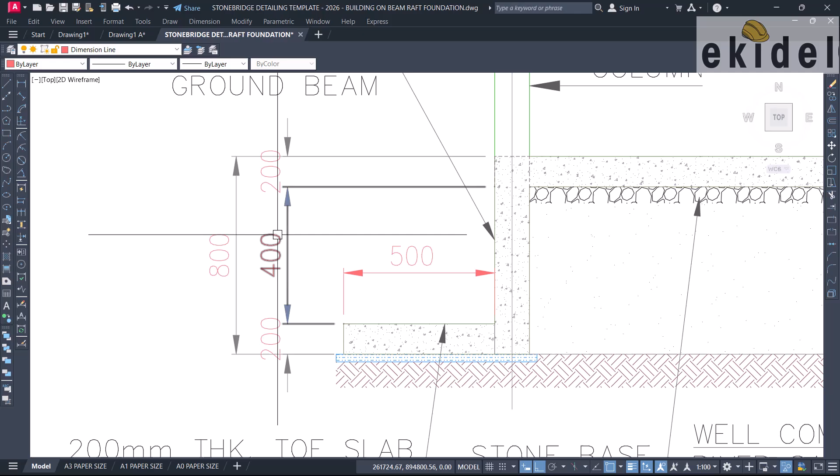So that if you add all together, the total depth of the beam, because the beam starts from here and then all the way down here, okay, that is fine. So this is now 800 divided, which is already showing here. Then this is already also showing here. Then what is left, everything now is captured.

We can choose to come here, move this like this, okay, that is fine, and then keep that there. Then everything now here should be shown, SS, I think it's X here, yes, correct. So I can come now, remove this here, take this off. So we have transferred. Then here also remove this here, take this off too. Dimension here should be 800 to 800.

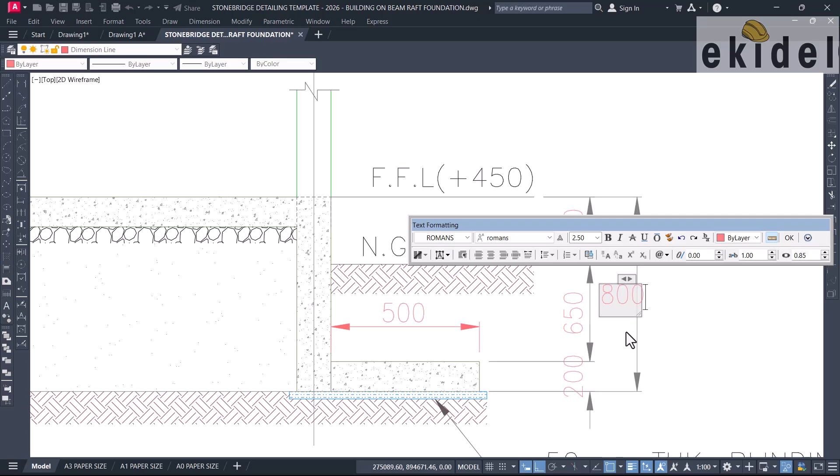If here is 800 now, and here is 200, let me see here, if here is 800, here is 450, so that gives us 800. Let me do that, 800 minus 450 minus 200. This gives, yeah, but I'm not going to dimension this like this. Instead of doing this, I can just choose to ignore this one here. Okay, that is fine, and just leave it this way.

This is okay. Here will be 150, because if we add all together, that gives you 800. Okay, that is fine. But on this face, this is okay. I can just remove this one too. Actually, just keep this like this. Correct. So on that note, now we have done all these. This is the blinding.

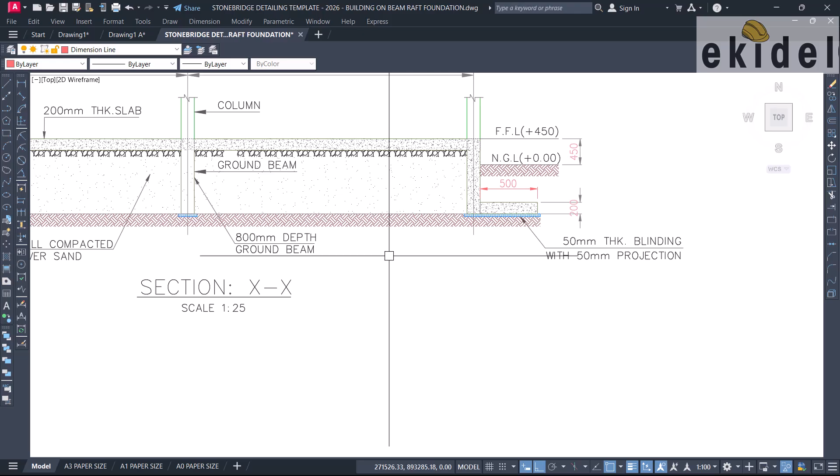Everything is okay here. This I need to collapse back by mixing together like this. Come here and then join like this. That is fine. So we are done with this section now. Then we come now, MA enter, and then match this right now like this to fit in this, and then this, correct? So I can fit in on the same dimension. Again, match these two to fit in this.

Here, this one is separated, so I'll come now, dimension this one again. I want to have the same similar dimensions, so come here, dimension like this. Keep this first, then dimension this like this. Okay, then highlight like this, delete, change it to 500.

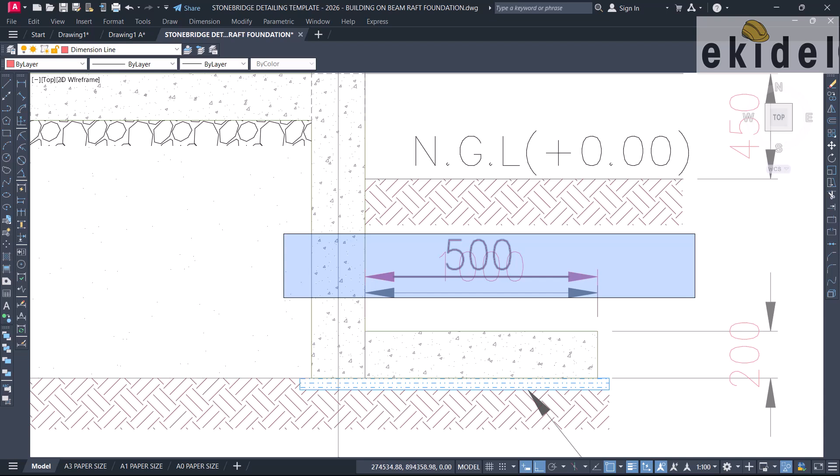Okay, 500, that is fine. Take off this line, take off this other line here, delete, and then you can choose to position this up a bit like this. Copy this, CP or CO, copy this from here, all the way down to this other side now, and then keep this and then highlight like this to remove this other one here. Delete this, delete this, delete this.

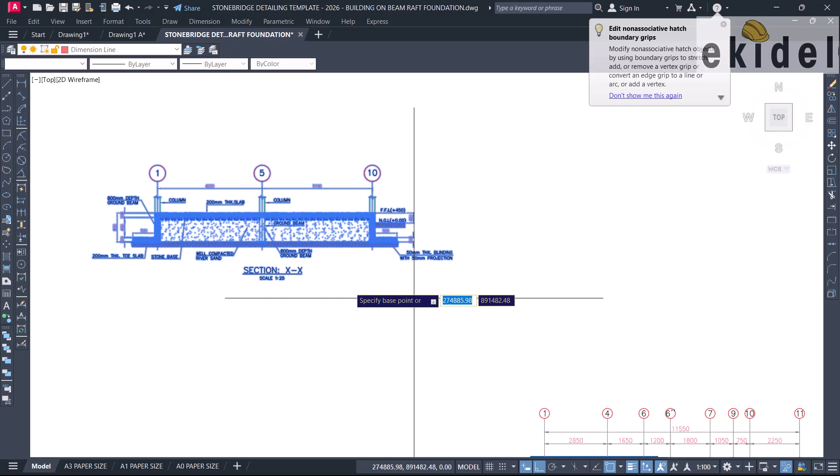Okay, that's fine. So in this course now, we are done with this particular one. Then move this like this, and then keep it closer to the drawing. Keep it here first, move this one out from this face, keep this one here, and then copy this particular layout, copy this, and then come here and keep this here, then move this from here like this, and keep this at the center first.

Now we need to scale this one backward because it is too big for the drawing. A good sheet is meant to fit in with the drawing. So I'll scale it back first by 0.75. Then arrange it again here. It's still too big for me.

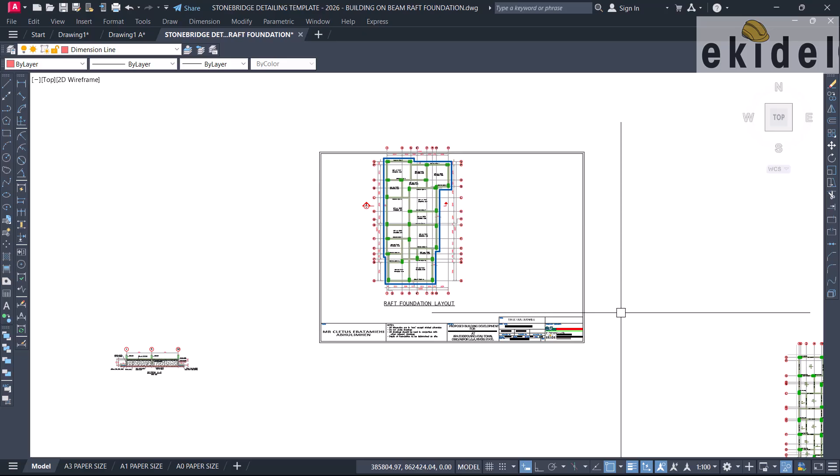Because a good drawing should fit on the sheet and not have too much gap. So I'll come again and scale by 0.9. Again, move this backward and move again. Correct, this is okay now for me. Now I'll copy this, CP or CO, and keep this directly here. Then remove this one now.

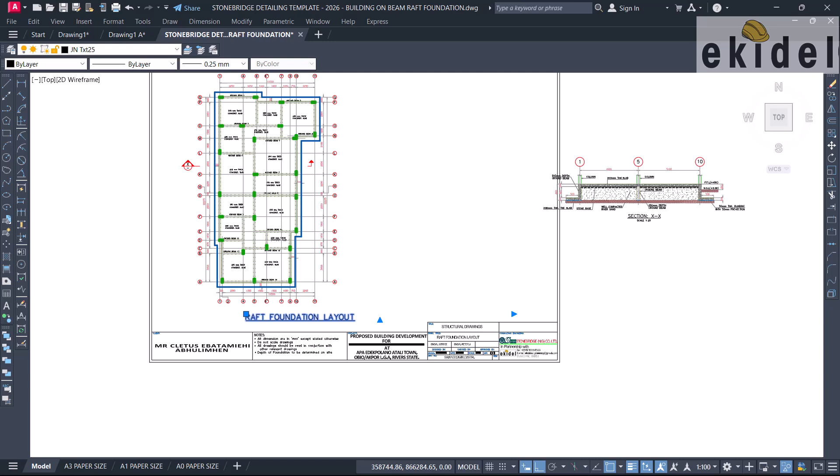So now I can see what we have so far. We place this inside here. If it's not entering properly, we can escape first and adjust this again a bit by moving it forward like this. Move this a bit and have a clearer view there. Send this back again, keep this around here, move this again and then keep this here.

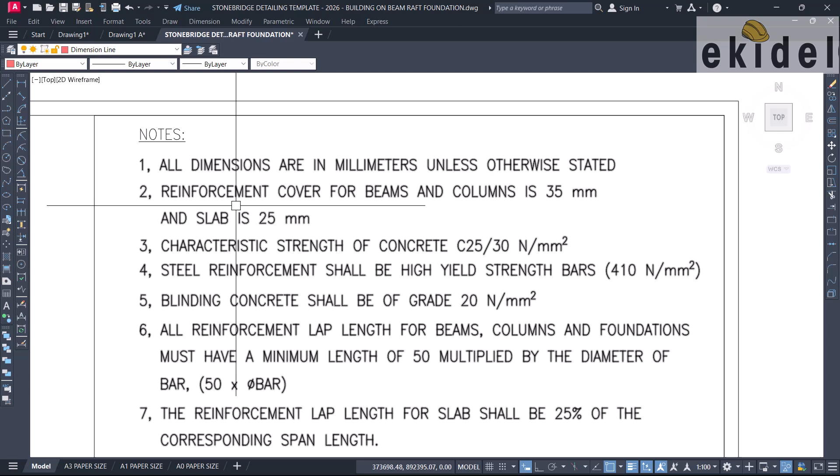Then come back to this place, copy this note, copy from this edge here to this other edge here. Once you paste this note here, you edit your notes. In this case, I use a reinforced concrete cover for beams. Since it's a foundation, I use 50 for my design, so I update the cover for foundation to 50, and for slab to 50 because this is a foundation.

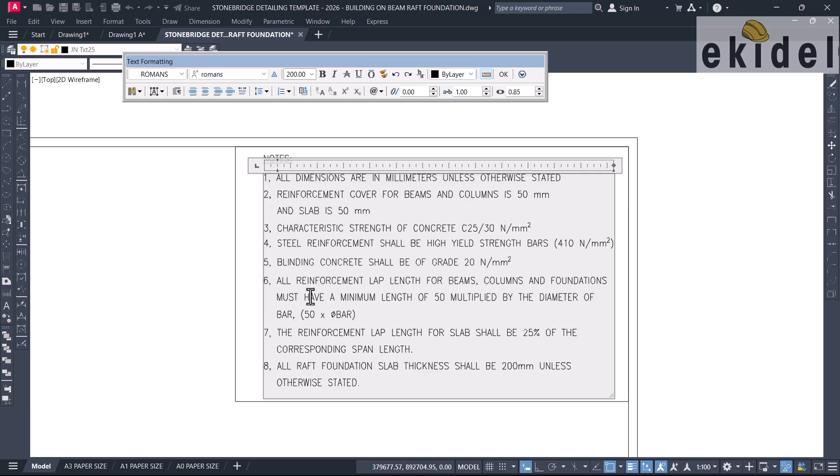Then it's C25/30, correct, that's fine. Steel 410, yes I use 410. Blinding concrete shall be grade 20, correct. All reinforcement lapping 50 times D, correct. Reinforcement lap length for slab, that's fine. Slab thickness shall be 200, yes, that's fine. So this is a good note, just leave this here. You can see how we have now completed this particular one.

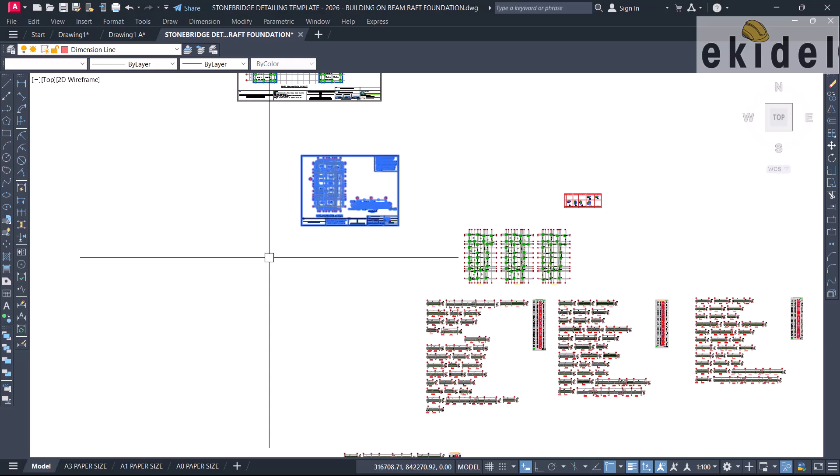The next thing we'll move on to is our beams, to put our beams on the sheet. We are now done completely with this here. So copy this, move this and place this here, then copy this again before sheet 1 and place this here. Correct. So we have just established the first one, which is the layout for the raft.

Next thing we do is our beams, placing the beams on the sheet. You can see that. So place these beams on the sheets. That will be in part 2 of this video.